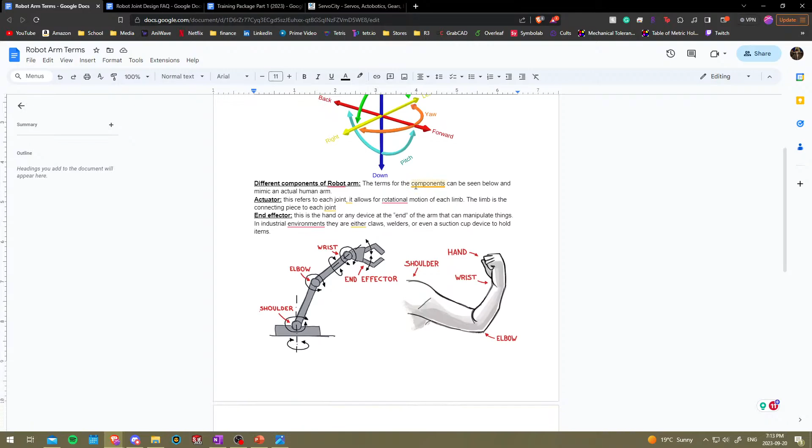Most arms though, you don't need all of the degrees of freedom, and I'll show you how having 6 could benefit you. So before I go into more depth about DOFs, what is a robot arm and what does it do? So a robot arm is just like your regular arm on your body. It's used to grab things, move stuff, type, a whole bunch of functions that require fairly precise actions, precise movement, precise tasks, right? So a robot arm is pretty much the same as a human arm, but it's made out of mechanical and electrical components and it's controlled with software.

And that allows you to move your hand in a full 6 degree of freedom. So before we continue, as you see in this picture here, shoulder, elbow, wrist, same as an arm: shoulder, elbow, wrist, and the hand is just that end effector. With robot arms, the hands are simpler than a regular hand. If you were to make a robotic hand, that would be called a bionic hand.

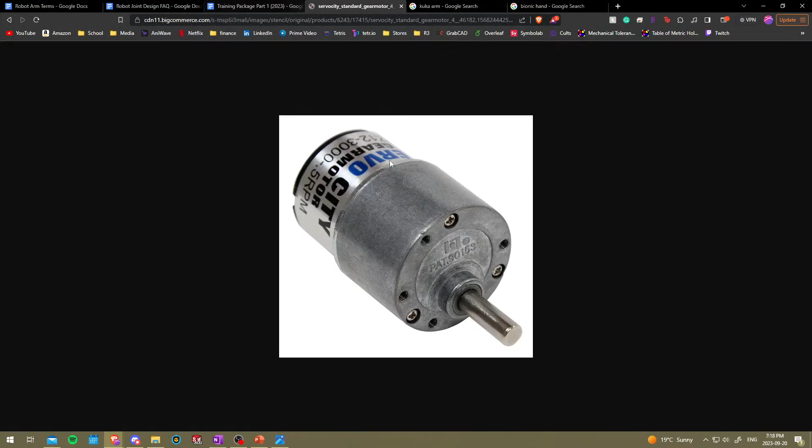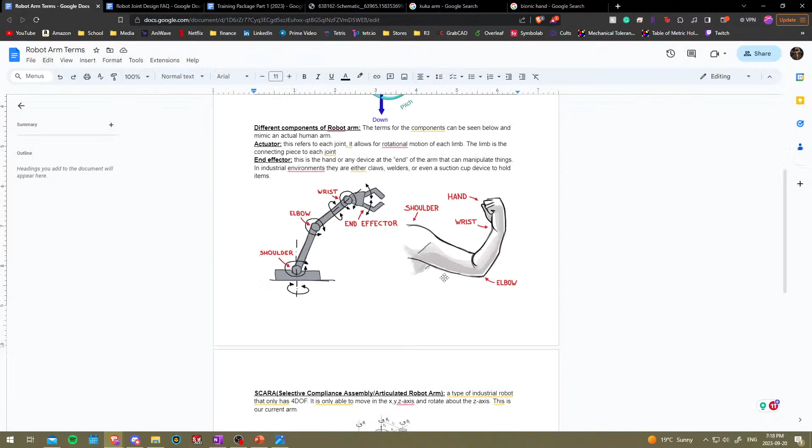But once I find it for you guys on ServoCity, they have a drawing that you could go off of. It's similar to this motor, but I'm just showing you as a reference here. On the web page, they have a drawing of the motor so that you see where the center shaft would be positioned with respect to the mounting holes. So there's a little cheat that I'll give you there for now. But yeah, so those are the components of an arm.

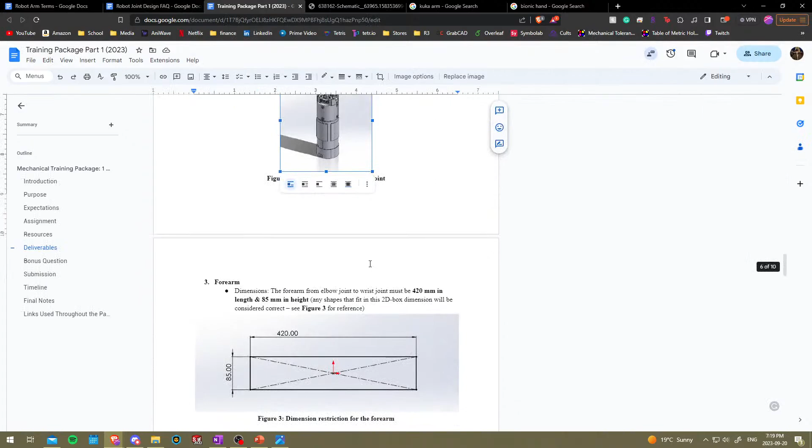Each of these motors for each joint is called an actuator. An actuator refers to something that allows rotational motion. There's something called a linear actuator, which allows a mechanism to move in a linear motion. In this case, the robot actuators are rotational motion. So Huang provides these actuators, like the wrist joint motor.

And I think you guys only have to make a wrist, if I recall. You don't have to make a shoulder joint, but you have to make the forearm. So you're only making half of the robot arm. You're making the end effector, which is the claw, and you're making the forearm, which is the structural component in between the elbow and the wrist.

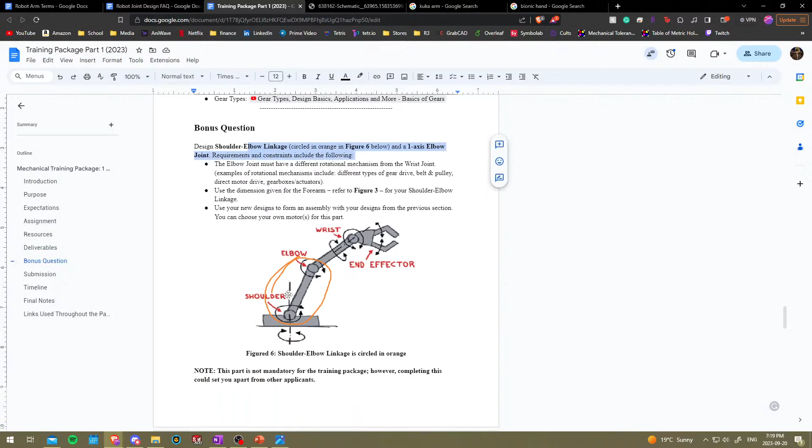So you're not actually working on an elbow. You're not mounting anything to the end of this forearm. That's, I believe, something optional that he gave you for brownie points. Yeah, so for brownie points, he would want you to create the rest of this. You're only required to make half of this.

I think he drew it there. I guess he didn't. Well, it's the other half that's not drawn here. So I'll kind of go over how you could go about that. Before I do,

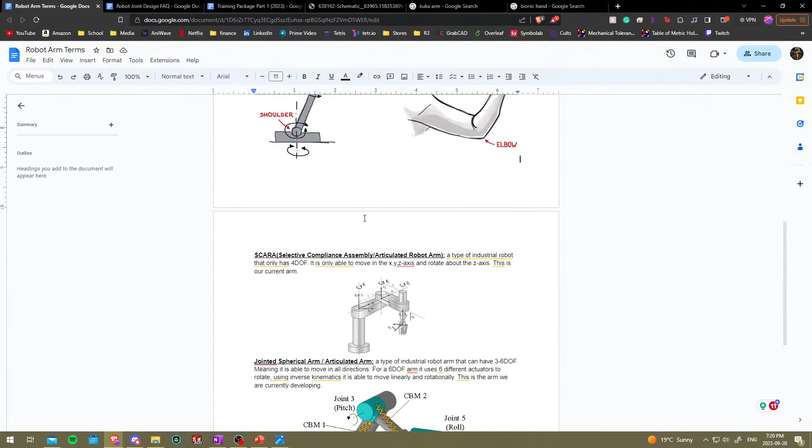so I covered that. So before I move on to how DOFs work on a robot arm, I just want to show you a few different types of robot arms. I know Huang provided some videos, which is this one here. This one's pretty straightforward. The two main ones that we use on our team is a SCARA arm, which is kind of like what our current arm has, because there's a linear component that moves our arm up and down.

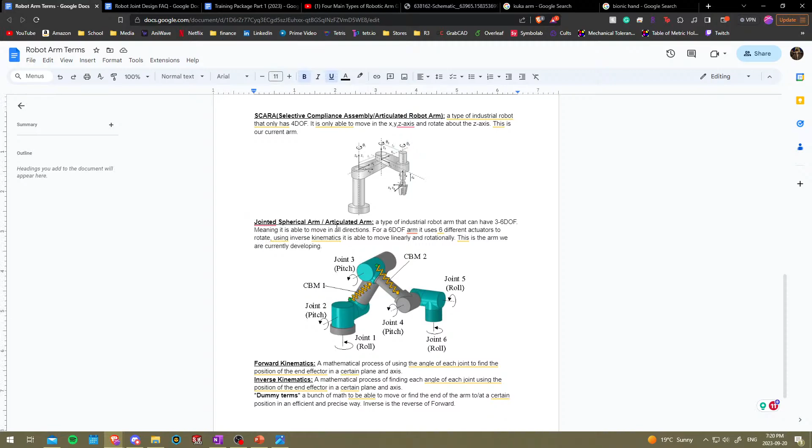So this picture here highlights pretty much how the DOFs would work. Each actuator has two motions where it has a roll and a pitch. This one has a pitch and a roll somewhere here. This one has a pitch and roll. It's kind of hard to visualize in picture. I'll show you a better video later. But that's kind of what it is.

Something here you guys don't need to know about now. There's something called inverse kinematics. It's a mathematical process that a software will be using to control and move our robot. But that's like something that you would have to know as a robot designer if you were to actually want to control it. So, finish covering all that stuff. Guess we will begin on actually how you will be getting started with your design.

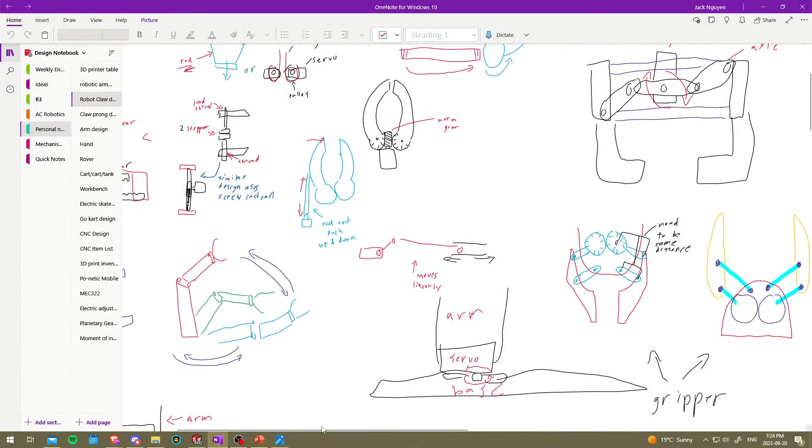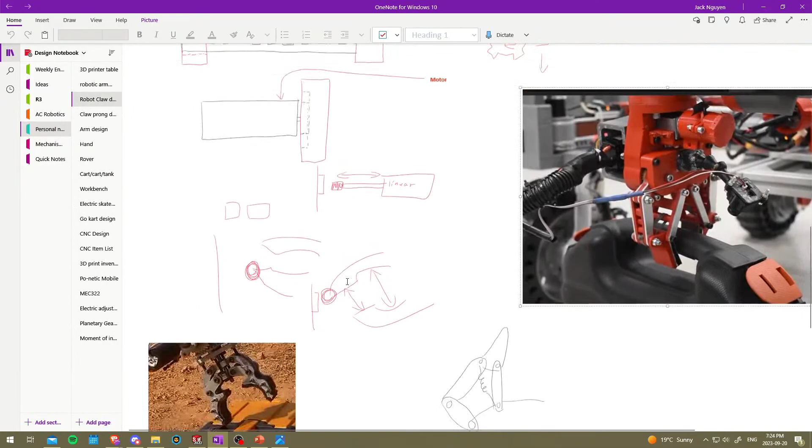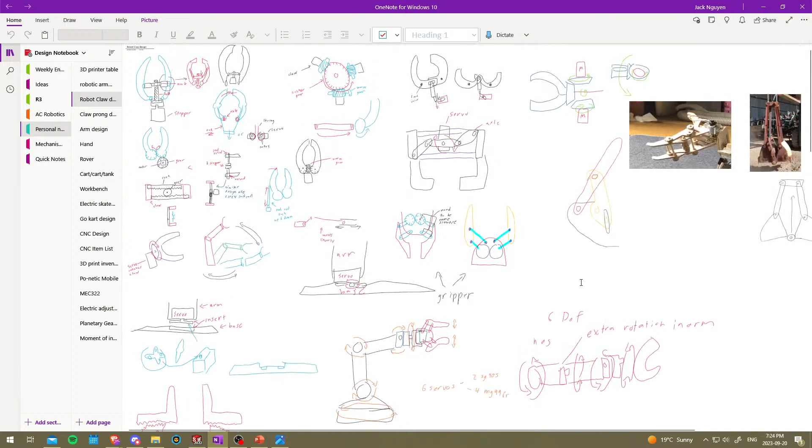So back when I was in first year, I was into robot claws and how different robot claw mechanisms work. So I have a sketchbook of various claw mechanisms, and it's just me trying to figure out how they work just from a picture and a small video on how it's moving, and based off that small video I was able to sketch it out and figure out which points are moving, which points on the claw are fixed, and which points are attached to the motor.

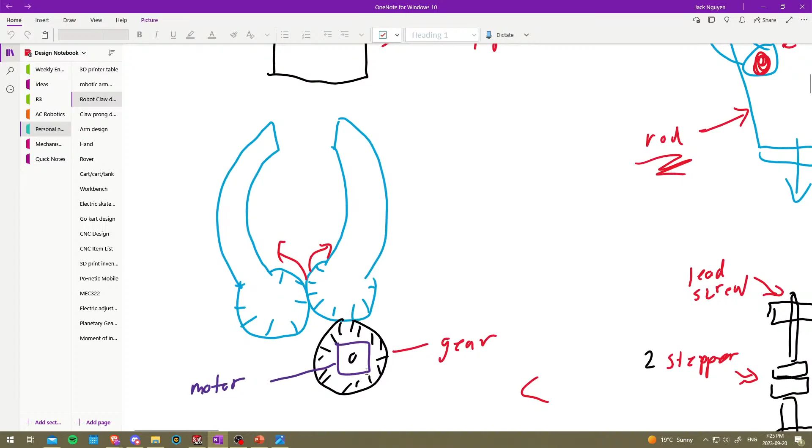So the simplest claw that you could make is, I should have a drawing here, something kind of like this where the two fingers of the claw have a gear on it, and you either drive one of these gears with a motor or you have a separate gear attached to this claw gear and that has a motor. So what do I mean by that? If you look at this claw here, essentially there's no motor on it. Let me find one with a motor.

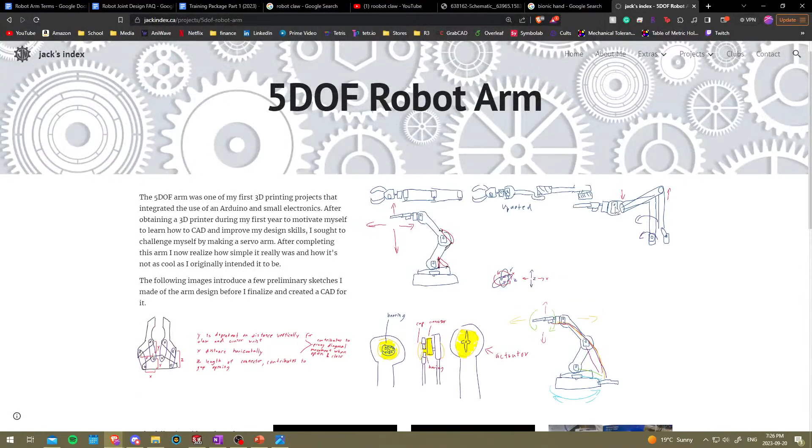Very, very simple. Once you start joining the team, you'll realize, oh, this looks cool at first. Once you understand it, you're probably gonna be like, oh, this is fucking shit. Like for a first year, what the fuck are you doing? This is an easy project. But not knowing anything at first, it is challenging. Once you begin to learn it, it's a lot easier.

So this is what I was saying here. There's a servo connected to this link here, and that link has a gear which allows you to move the other half of the claw. This claw specifically is called a 4-bar linkage claw because there's 4 bars. So I'll pause it here.

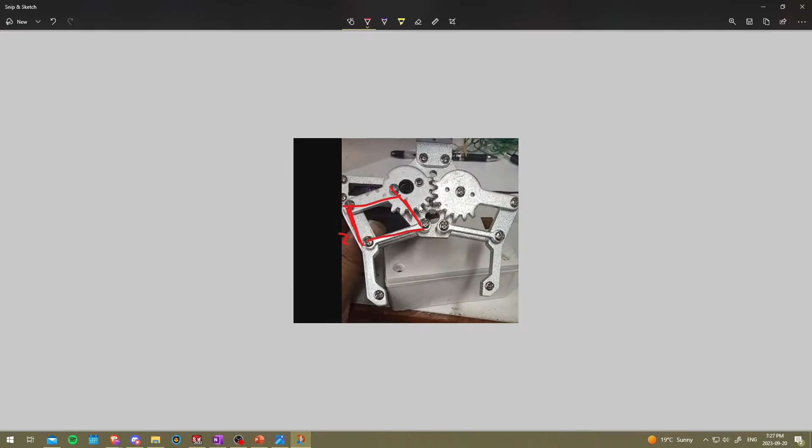There's 1 bar here, there's 1 bar here, 1 bar here, and then this base joint is a bar, but it's a fixed bar, so that this second bar here, I'll call this bar number 2, can move freely in air, and then bar 1 is fixed. So you could do a 4-bar linkage claw.

It's pretty simple. This one here is also a 4-bar linkage, but it uses a whole different mechanism. So instead of gears, it uses a screw here, and as the motor turns the screw, the nut in the center of here will move up and down, and that's pretty much a linear actuator. This mechanism here causes an item to move in a linear motion. So that's one other idea.

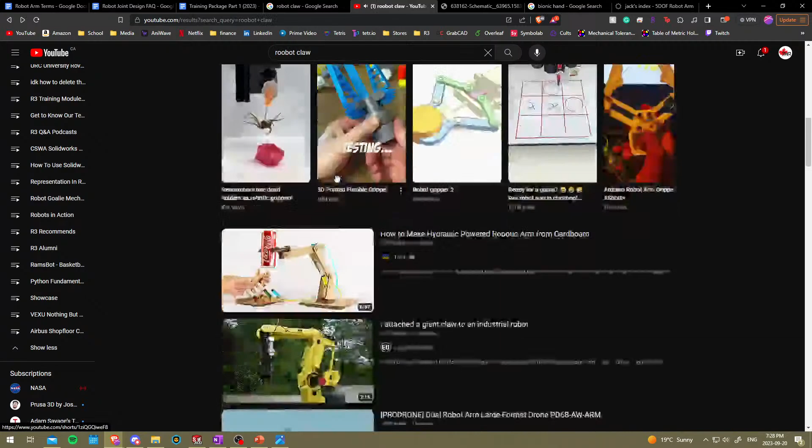But yeah, I would start off with just searching up claw designs. YouTube shorts, YouTube videos, TikToks, Google images are perfect references on how you could do that. Just make sure that whatever you do, it somehow integrates this motor. Because if it doesn't, then you didn't make what Huang wanted you to make.

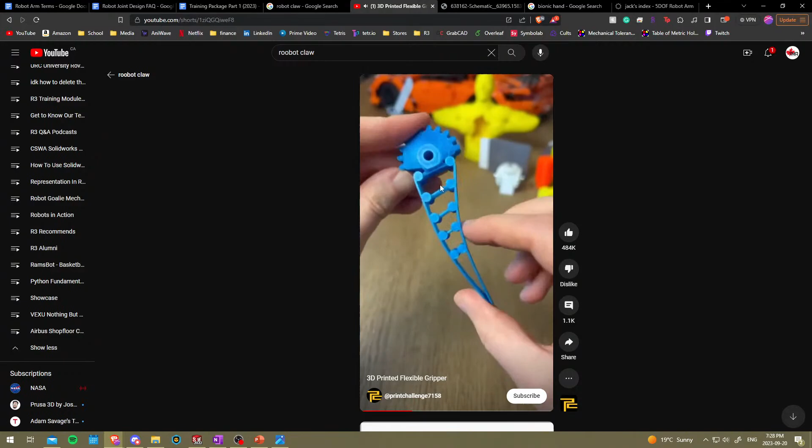So I'll show you one more design here. You don't have to go as high tech as this guy. He made his claw have these cutouts so that it's compliant, which means that it's bendable. It could grasp against an object. You don't have to do that. If you want to make your claw have a compliant finger, go for it.

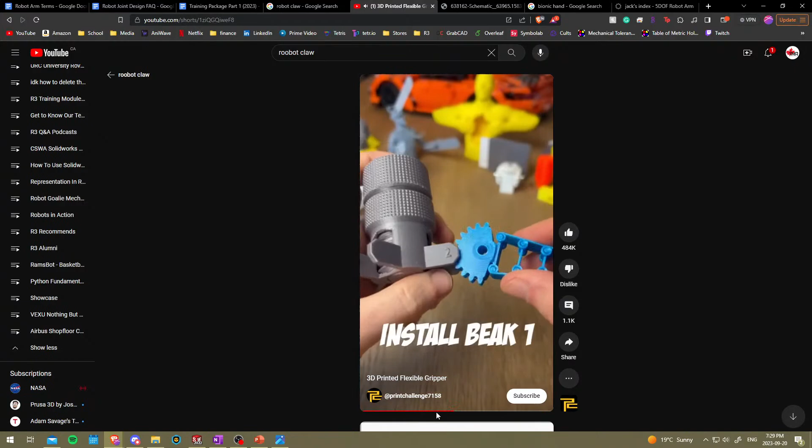I feel like for Huang, if he sees that, he's gonna be like, oh shit, this guy knows some mechanical knowledge. He's probably smart as shit. So it is brownie points if you do that.

Some other claw designs, like our current ones, we put a rubber grip. So if you look at this yellow piece, it's a rubber grip on the end of the claw so that it could grab it better. It provides a constant force. If that's too difficult for you, you don't even have to add that rubber grip. You could just keep it without the rubber grip.

So if you look at this one here, it's literally just 2 fingers with a gear at the end. This would be, I'd say, the simplest design you could make. If you're a first year and you're a little bit intimidated on how well you're gonna do, I'd say stick to something like this because it's a little easier to do. It's a good start. But obviously it won't bring you to team A. You'd probably be team B.

Okay, so next is the one axis wrist joint. So when he says one axis, that means one DOF. So it only moves the claw in 1 degree of freedom.

Axis and DOFs can be interchangeable, but usually with axis, there's only 3 axes of motion, the Z, Y, X axis, and then you could rotate about those axes. But yeah, that's what he means by one axis.

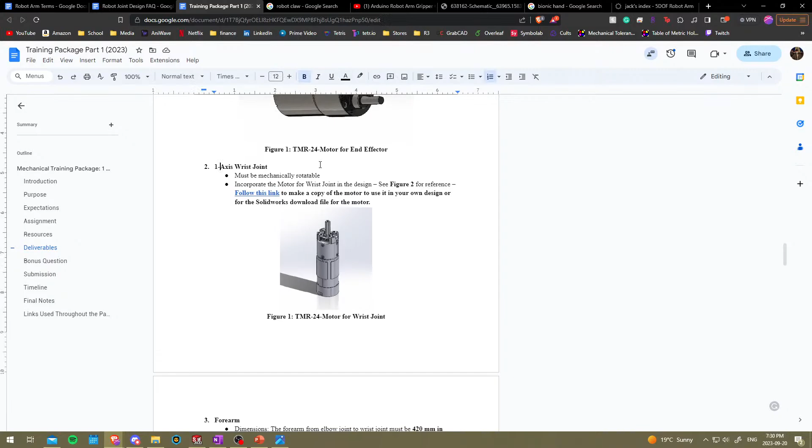So if you search up robot wrist, hopefully we could find some sources. The issue with some of these sources, it might show you an actual bionic wrist, which is something that you probably don't want. So let's see if we search up one axis robot wrist, that might be more specific.

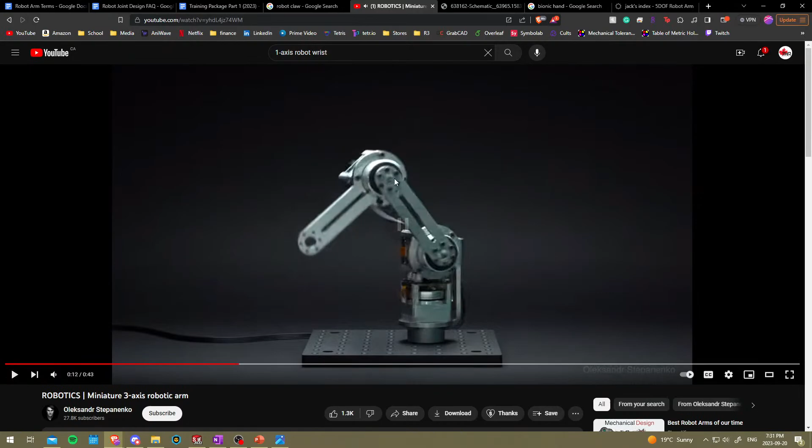It's a very hard thing with this because you won't find the specific video you want. You kind of have to watch videos on robots. I believe Huang attached this video to the training package, but this robot here is a three-axis or a three-DOF robot because it could rotate about here, and the base is able to rotate. So that's three different motions that it's able to do.

And the wrist would pretty much be this motor here, and then this piece would essentially be your claw. So you have to figure out, okay, I have a motor here. I want to connect that motor to a claw, and then also this motor needs to be mounted to this forearm, which is this bar. So what you want to make is just this upper half. So this here is the wrist.

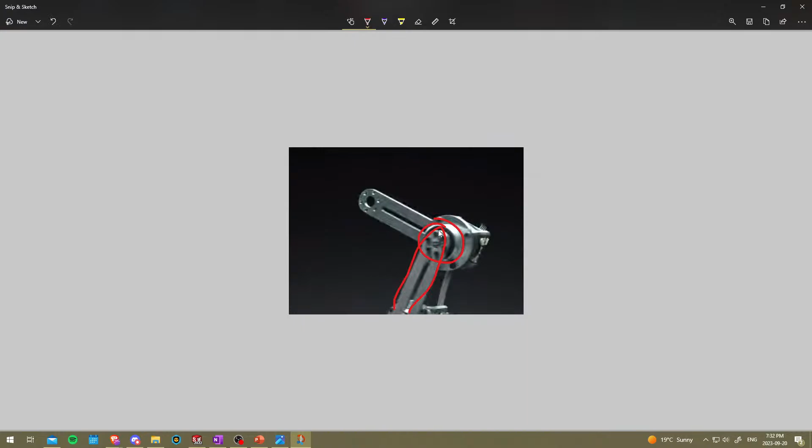Somehow a motor is mounted to that, and additionally the motor shaft is mounted to this piece here, which will be your claw. So that's what you're gonna be designing. The claw has its own motor, obviously, but once you figure out how to make the claw, then you could figure out how to mount that claw to a wrist, and then how to mount the wrist onto a forearm.

So that means you need to figure out how to mount motors, and you don't learn this in school, but if you search up motor mounting, there's different ways you can mount a motor. If you look at this here, there's a bracket where this plate here screws onto this motor, and then it frees up the shaft so that anything that's connected to the shaft can freely rotate. So same thing with this motor. It has a bracket where there's a plate,

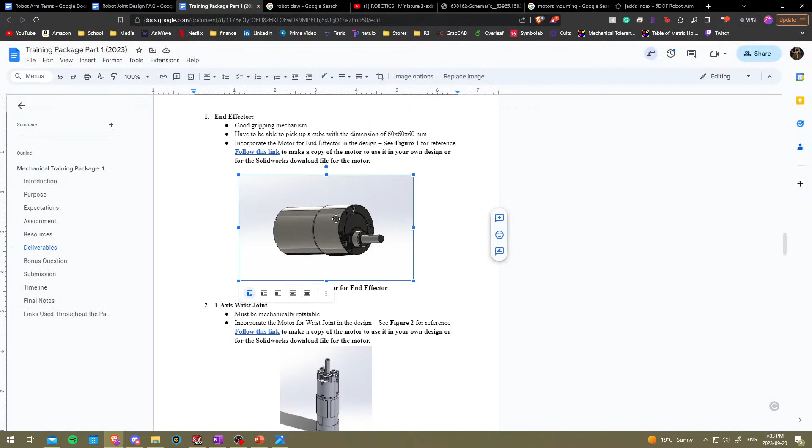and that plate allows you to screw in screws onto the mounting holes of the motor. So if you look at this motor, it's kind of hard to see, but there's actually four or five mounting holes. So if I zoom in, let's zoom in here. This is a mounting hole, this is a mounting hole, this is a mounting hole, and that's a mounting hole. So you have four mounting holes, and you would have to make some form of plate.

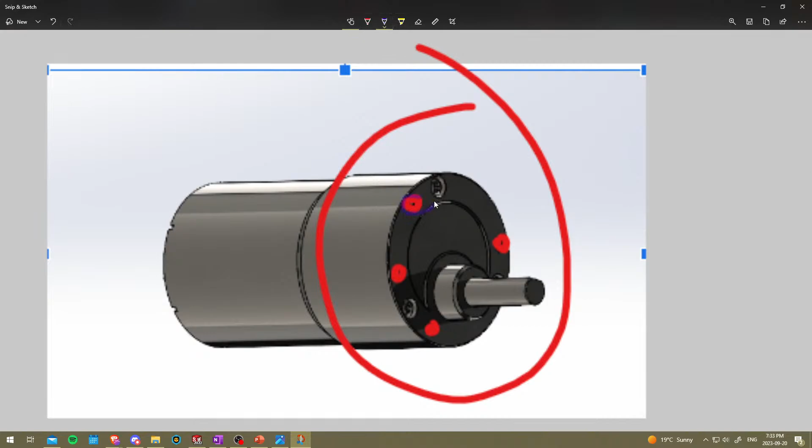It doesn't have to be a plate, but some sort of object that has holes so that you could put screws into these holes to mount it onto an item. And then also it would need a hole here so that the shaft could feed through it. So that's how you'd mount a motor onto your forearm, whatever your forearm is.

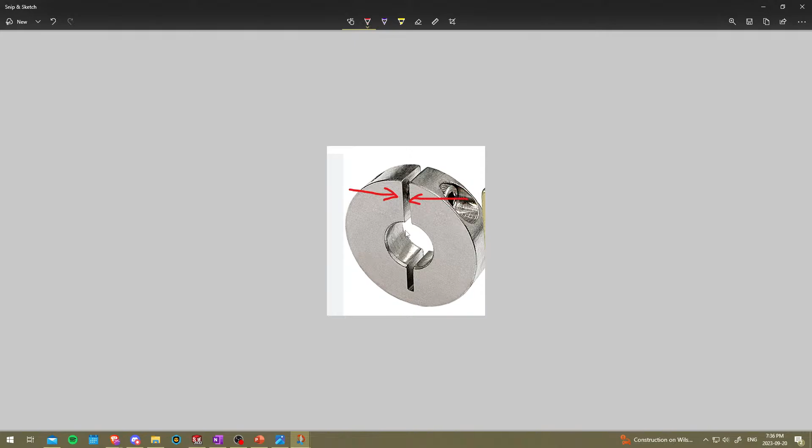As you tighten the screw, what happens is this cut here will begin to close in on itself, and this circular hole was once a circle. That's a terrible circle, I'm sorry. It's once a circle. Once you screw it in, it kind of becomes like an oval, and that force from the clamp will cause it to stay on the shaft. So that's how you would mount something onto the shaft of the motor.

You'd have to figure out your own mounting mechanism to get that shaft mount onto the claw itself. And then you'd also have to figure out a way to mount the motor mount onto the wrist that you're making. So I'm not gonna cheat here. I'm not gonna help you guys cheat, but I will give you some rough ideas on what I would do and what you could do. So I'm gonna proceed with caution right now because if I go too far, Huang is going to kill me.

So let's say, I'm gonna download a random motor off of ServoCity. I'm not gonna use the one that he gave you because then you guys have access to my video and you'll just copy it. So I'm gonna take a random one off of this website here. So I'll take this. This website's good because you could usually download the parts on SolidWorks. I don't think you could download these ones. Huh. Alright. Give me 1 second. I'm gonna choose this one for now.

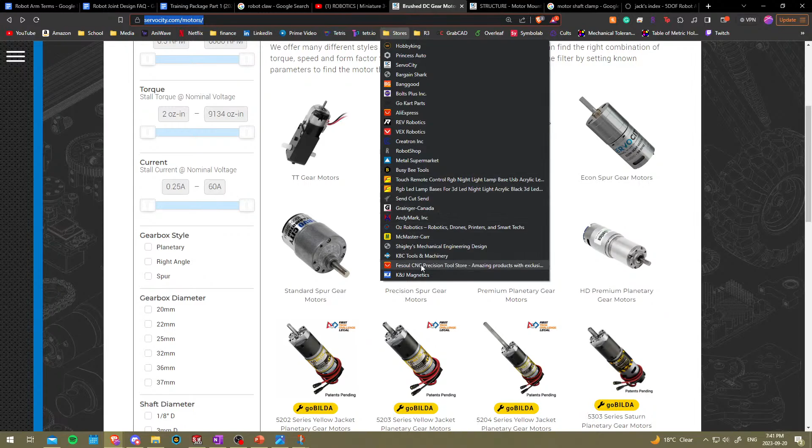Okay, well this website doesn't have any of the things that I need, so I'm gonna go on a different website. If you see, I use a lot of different sites. Most of these are because of R3, or sorry, TMR. Damn, bro, these websites don't give the CADs for this stuff anymore. Interesting. Okay, Rev does. I'll use Rev.

God damn. Why is it so much work just to get a fucking motor? Alright, I'm gonna take this one for now. Where is the CAD? Okay, well, I'm just gonna go on my files and find it. I don't know why I can't find anything right now. Okay, let's use this. Sure, yes. Okay, we'll use this motor.

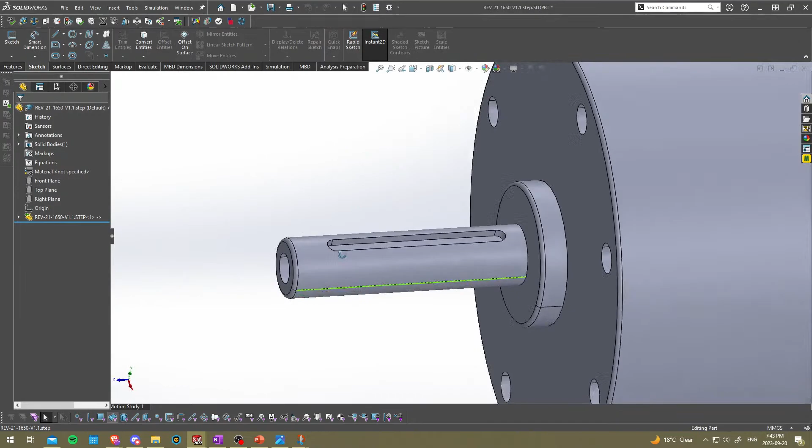So this motor here has a shaft. On that shaft, obviously the motor itself has these, how many is that? 7 mounting screws. So say we gotta make a wrist for, I'm gonna make a fake claw. So let's make a fake claw. So imagine somehow you finish the first step in like 30 minutes. Good for you. And you designed your first ever robot claw that mounts some form of motor.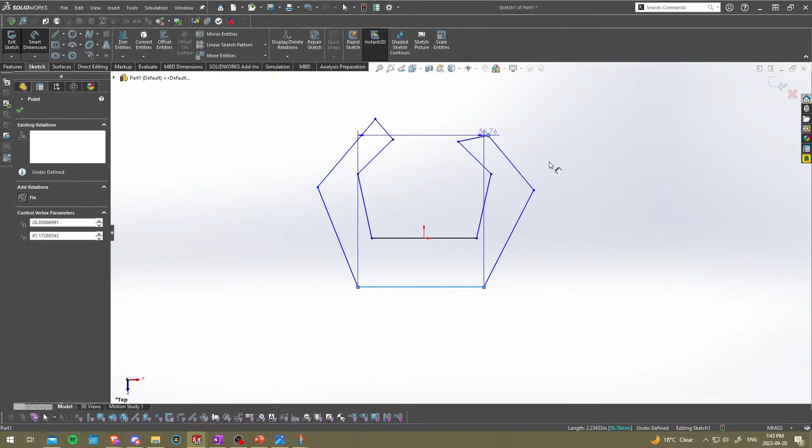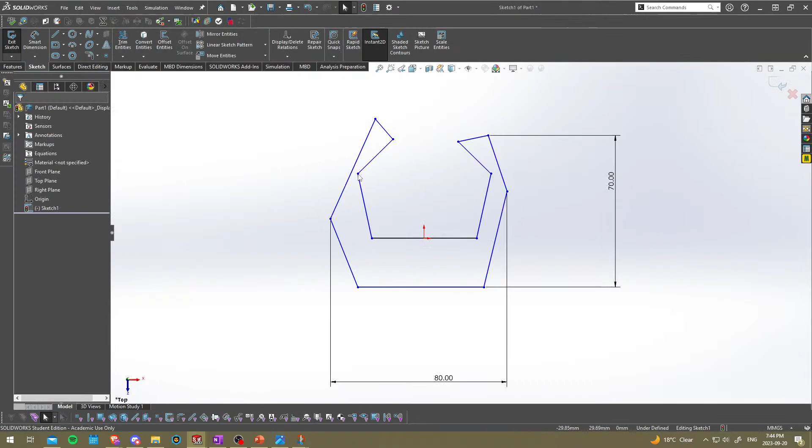Abdurrahman here said he didn't bother with fasteners. I don't know what Huang's rules are about fasteners. I know last year I said no to fasteners because it's hard to learn fasteners at first. It took me a while to figure out how to spec fasteners and all that type of stuff. So you don't have to worry about that. Okay, so let's say this is my claw, and then I'm gonna put a hole here, some form of hole. Yes.

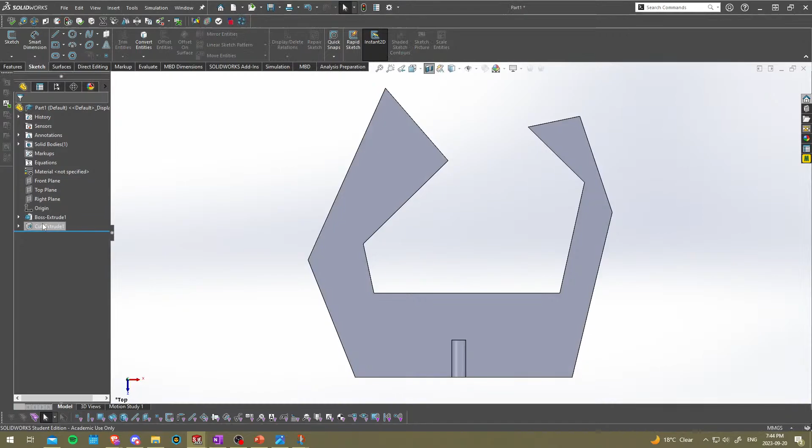Okay, and then this hole here is gonna have a set screw in the middle. So I'm just using, okay, I'm gonna do this slowly again because I realize a lot of you guys might not know how to CAD or use SolidWorks. For those that decide to download SolidWorks, I'll do this slowly.

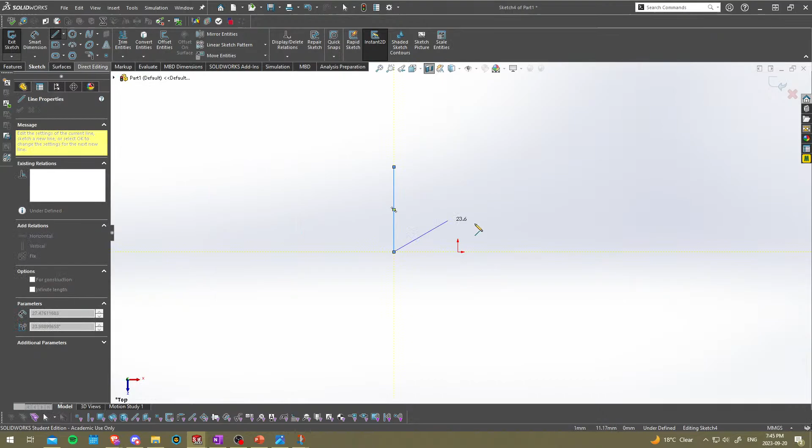So there's different tools, line tool, circle tool, square tool, whatever. Since I'm making a dummy claw, I'm just going to use the line tool. You select the line tool, and then once you place a line, it continues to create more lines that are attached to each other. And you could keep placing them. And once you want to stop, you could either enclose whatever you're making and it'll stop the line tool, or you could hit escape on your keyboard and it'll stop the line tool from continuing.

So let's say this is my claw here. Smart dimension lets you dimension your drawing. So this is random sizing. I'm just gonna make this 70, make that 70, make this 15.

There's another feature that you could do when you click on one line, hold control on your keyboard, click on another line. It selects both of them at the same time, and then on your left-hand window, there's something called the property view or the properties window. And under there, there's something called add relations, and you could basically add a relationship between the two lines. So if you want them to be equal length, you could hit equal, and that will do that for you. So I'm going to make these equal because it's the same thing.

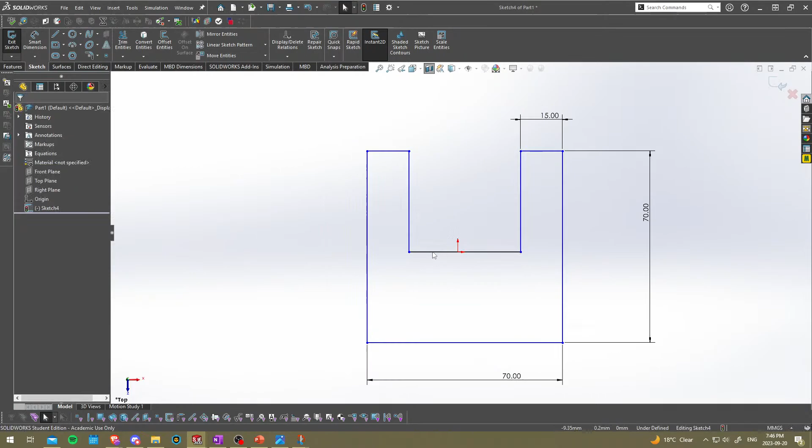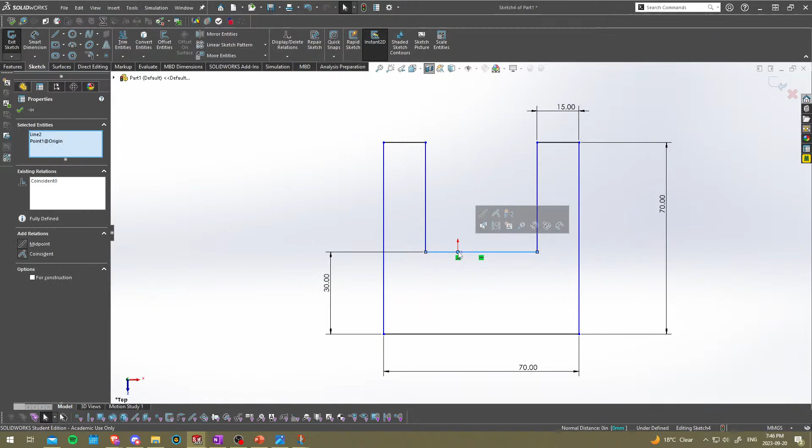Okay, so right now it's blue. If the lines are blue and not black like this here, it means it's undefined. So that means you could still move it. You haven't fully constrained it with dimensions or relations. So I think my last dimension here is this one, and then this could still move. So I will center this by selecting the origin, this line, and choosing the midpoint relation. So now it's fully defined because it's black.

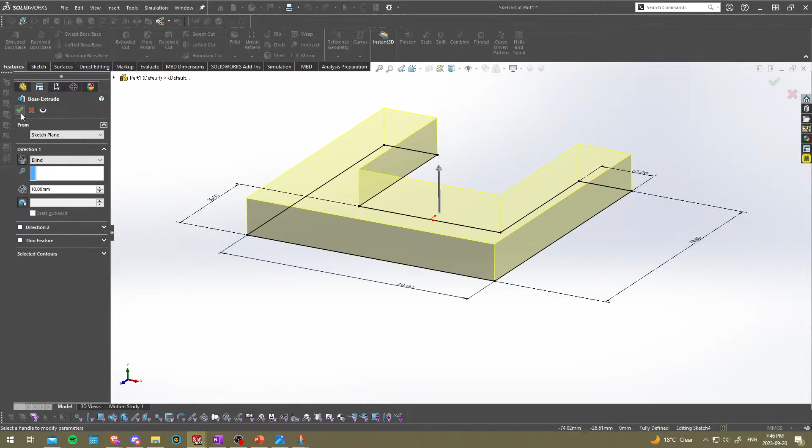I could hit boss extrude to make this 2D shape into a 3D shape. So I do that here, and then you could set this dimension. I'll make it 10, arbitrary value, but a lot of the dimensioning portion that you're going to be doing is all arbitrary. There's no set dimensioning number for you to use. It's just, oh, I think this looks nice and I wanted an even number, so I'll put 10. So that's kind of what I did here.

I like the numbers 5, 10s, and even numbers, so 2, 4s. I don't like 6, so I usually keep it to 2, 4, 5, 8, and 10s. But that's just my preference. Everyone has their own preference.

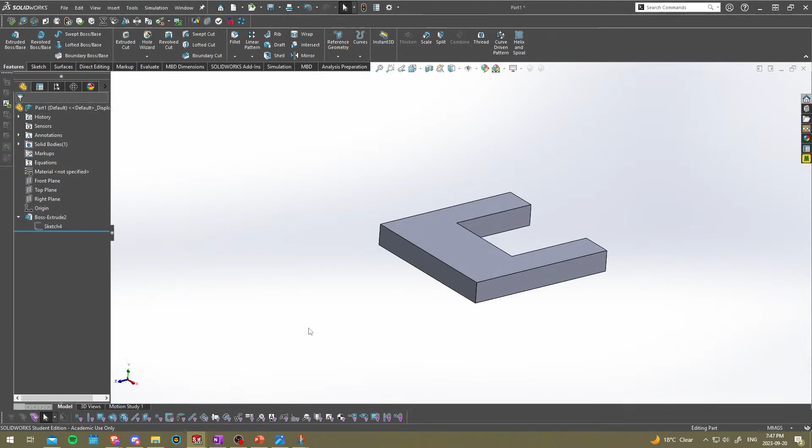So this is my dummy claw. Imagine somehow a motor mounts onto it. I'm not going to add the motor. And then I need to add some form of mounting system so that this motor shaft can mount onto this claw so that it works as a wrist. I'm going to make something simple here. So like that set screw mounting mechanism that I showed you earlier. I'm going to make a hole for that shaft to go in.

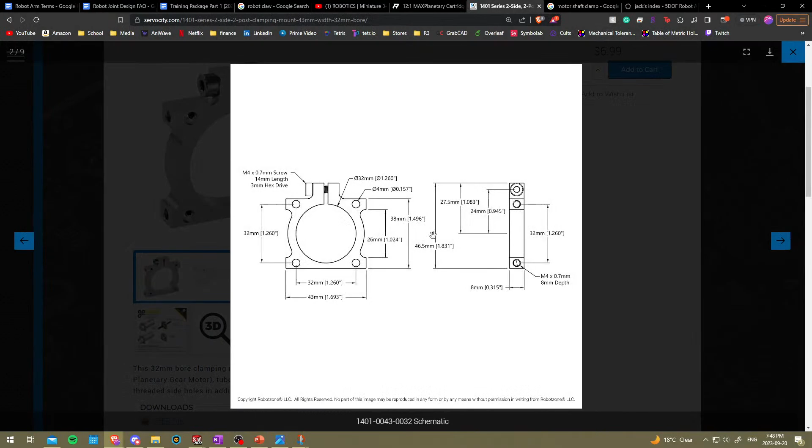So you take that shaft and you would measure it. The way you would measure it is figure out what the part number is, go to ServoCity, type in the part number, and then when you open up the motor, there's going to be a drawing on the web page. For my case, I don't know what this motor is, so I'm just going to choose evaluate and hit measure, and then click on this here to get the radius. So the radius is 4 millimeters. That means it's 8 millimeters in diameter, so I'll make that 8.

It's a pretty big hole. Okay, let me make this a little thicker since the hole is so big. And then I'll center this. Okay, that's 8 millimeters. Now the last thing is just to fix this so that it stays at this point. So I'm gonna take this here and take this center point and choose vertical, and that basically fixes it so that this point is always vertical about this origin point.

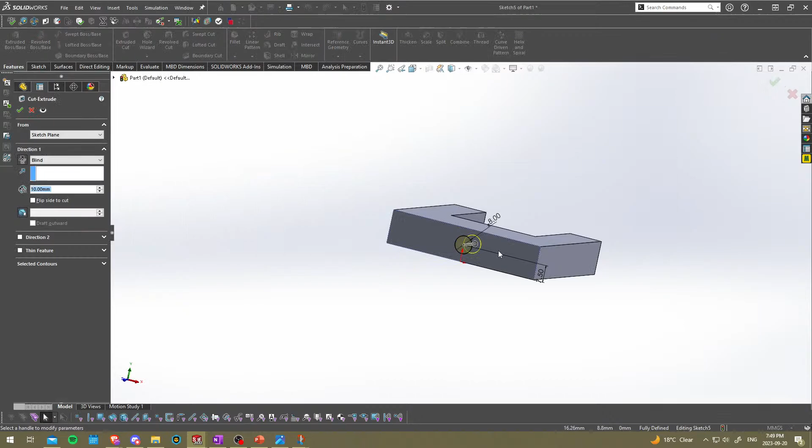And then I'm gonna cut extrude to make a hole into the part. So 15, arbitrary value. You could make it the length of the shaft. But if you make it the length of the shaft, remember you have to take into account the mounting plate or the mounting point on this motor itself. So I'll only do like 2/3 of the length.

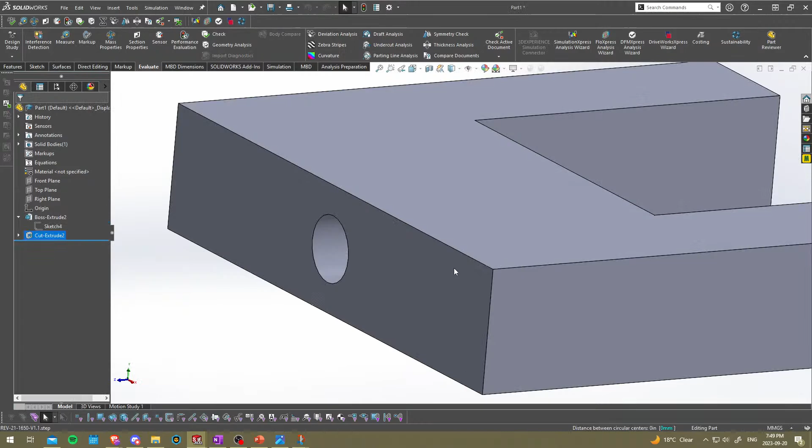So let's measure this. That's not the right thing. Measure, so hit that, hit that. Okay, measure tool doesn't want to work. So it's 31.5 millimeters in SolidWorks, and if you're using Onshape, it's pretty nice because you could put equations into them. So I will put 31.5 times 2 and then divide it by 3, and it will do the math for me. So 21 millimeters. So we made a 21 millimeter hole for that shaft.

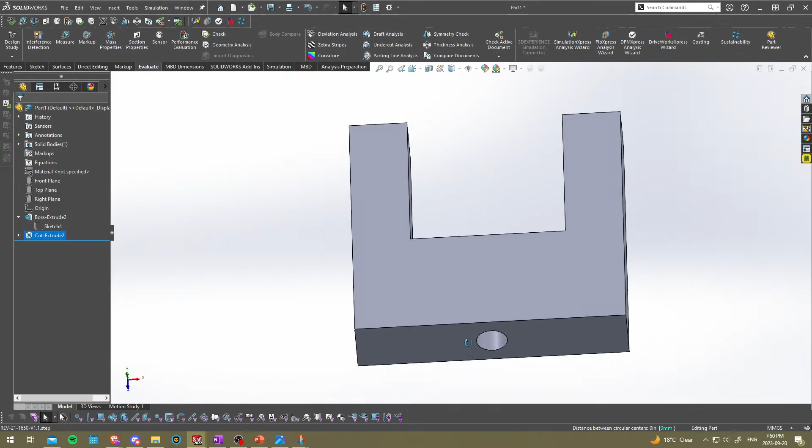Now I have a few options. I can make a set screw so that it applies force onto the shaft and it holds it in place. Or I could do the clamping mechanism. With this design here, it's a little bit harder to make a clamping mechanism because I would have to have that clamping screw, and it'd just be more work. You could do it, you just have to figure out how to make it.

There's another thing that a lot of modern machinery uses nowadays. It's called a keyway. So shaft keyway, what that does is it couples the shaft onto whatever you're putting the shaft onto. It couples it so that it could rotate together. So the reason why we're mounting stuff onto a shaft is so that it could rotate with the shaft.

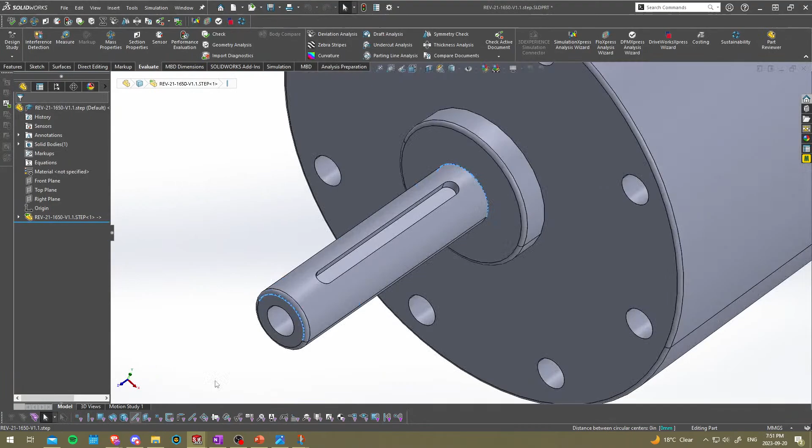This keyway, the way it works is you would have to make a keyway into your part, and then your shaft would need a key seat, which is this component, and then you would also need a key, which is like a piece of metal that seats into the key seat, and it also slides into the keyway. So if you look at the shaft that we're using, it has a key seat. So if I wanted to, I would just cut a keyway into this hole here and then put a key into it.

The issue with this though is it couples it when it rotates, but that means you could still slide it in and out. You obviously want it so that it can't slide in and out, and it could also rotate the part. So in this case, we'll just stick to a set screw because it's simple. I don't think it's too big of a deal if you have a set screw in yours.

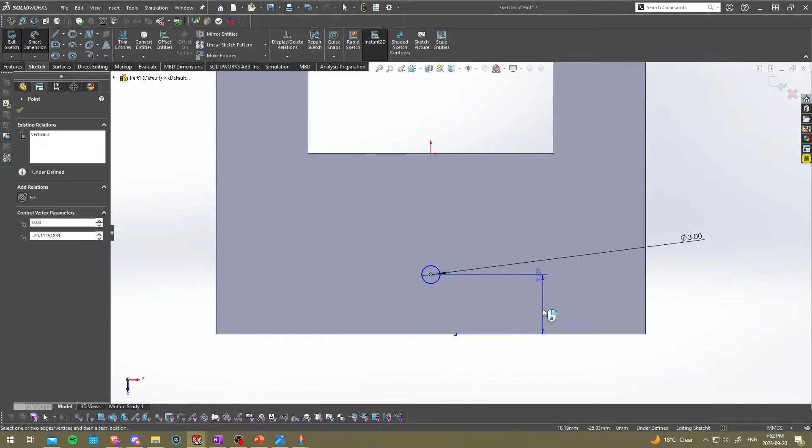I know last year one thing that I was testing on is to see if people would incorporate a set screw or some type of clamping mechanism, which they didn't. So this year I'm just gonna teach it because it's kind of hard to know if you're not a third year, because you learn it in third year.

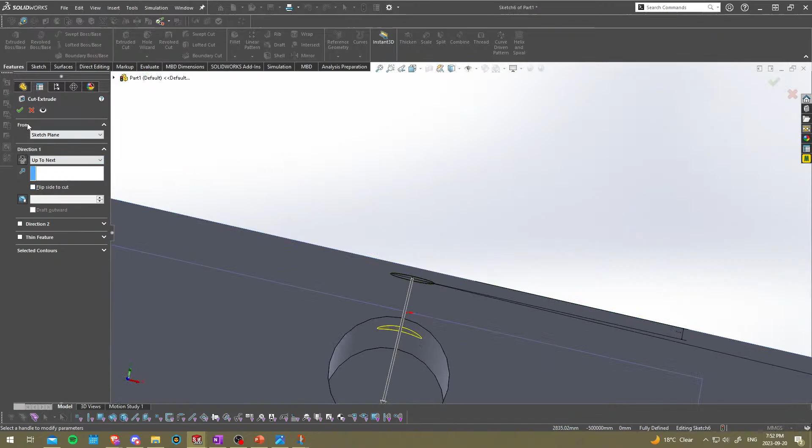So I'm gonna change this to up to next, which cuts it up until the next contour, the next face. So it only cuts up to there, it doesn't cut straight through the part. And this is my little keyhole. You could be a little extra and choose the thread feature to cut a thread into this hole. I'm gonna do that right now, but you guys don't have to do that at all. This is just me being extra.

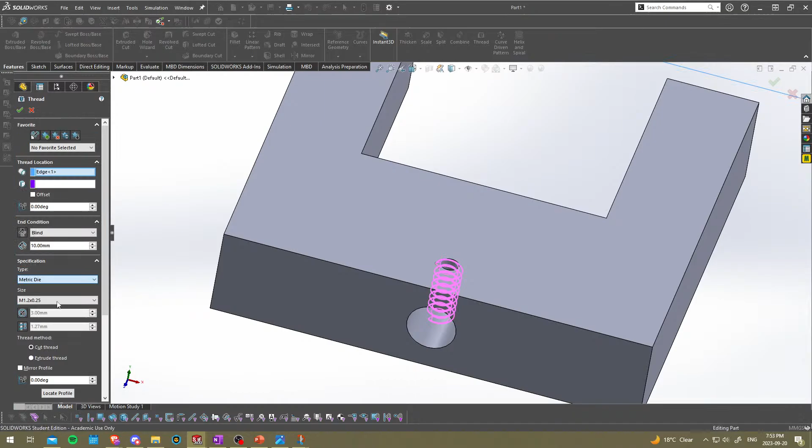I made this hole 3 millimeters for an M3 thread. Nice. M3 is not even here. M2. Oh no, it is. M3. Okay. That's good. It only needs to go up until, I'm gonna make a guess and call it 8. Yeah. No, 8 is too much.

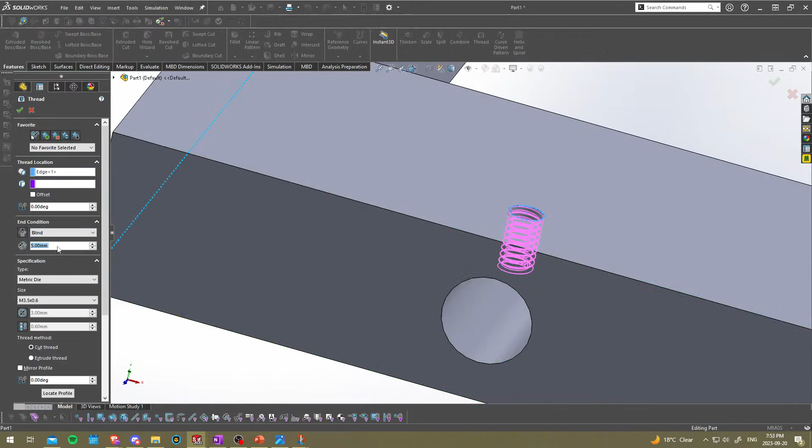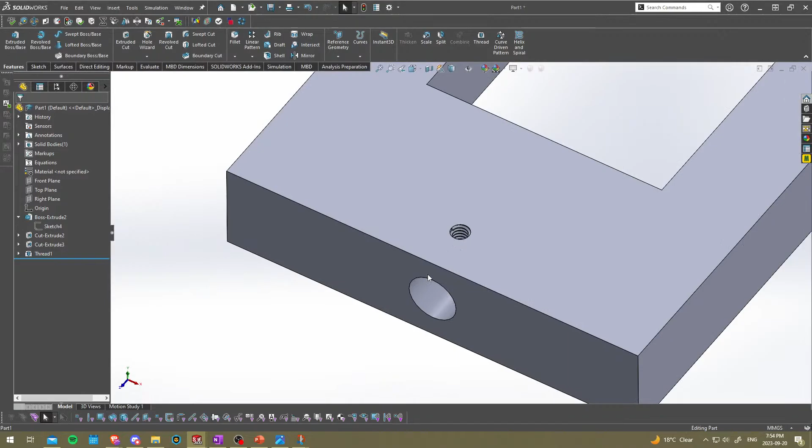Let's do up to selection. So up to this point, or up to this point. Do that? No, that doesn't work. Okay, that's fine. I'll just do blind. So we'll do it for 5 millimeters. Like I said, this is completely optional. Use extrude, yes. So it just makes a thread here. This is extra as fuck. You don't have to do it, but I'm just trying to show you. The set screw hole has a thread so that you can put a screw straight through it.

So now let me show you how this wrist is gonna work. So we'll make an assembly. Let's save this. Where should I save this? Dummy claw. It doesn't look like a claw, but it will work. So make assembly.

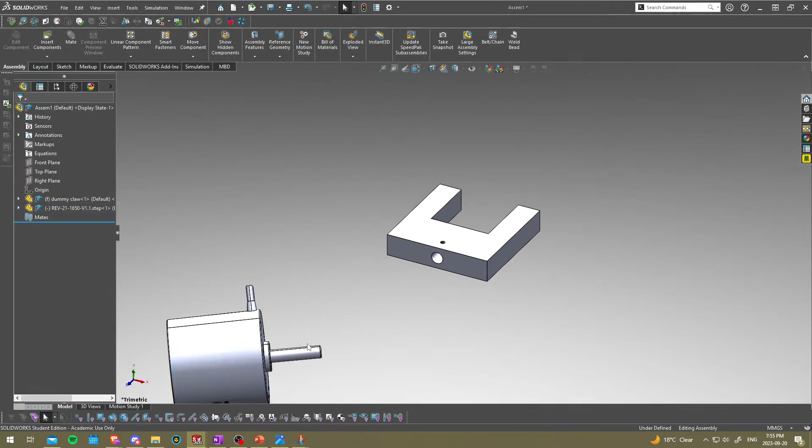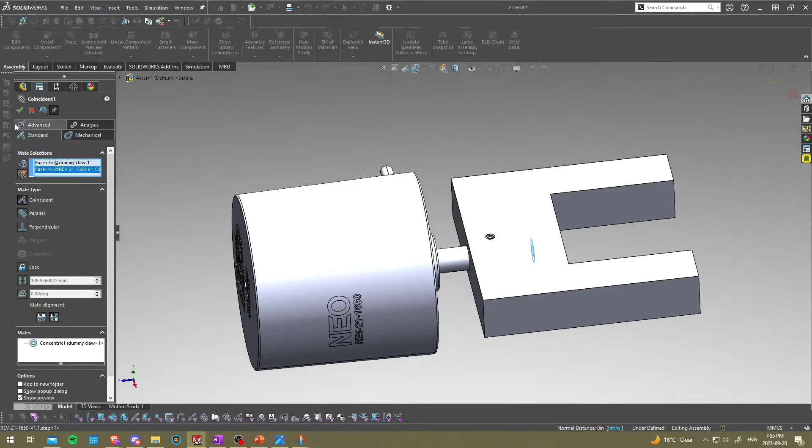And then add that motor in. And then pretty much just mate the shaft onto this hole, or like the claw mounting point. This is just arbitrary, obviously. Shit, I can't see the inside of that. Hit that, hit this. Good thing with SolidWorks is it automatically mates. For those using Onshape, you have to choose the specific mate. So the tutorial will kind of go over that.

Do you need to design parts with tolerance? No. So you don't need to incorporate tolerance in your part. Usually when you're designing parts in SolidWorks, you could add a tolerance feature to your dimensions, but usually the tolerance is easier to do in your drawing that you're going to send out to manufacturer. So none of these are actually getting made, so you don't need to tolerance them.

But if you were to make it, let's say, if you were to 3D print it, you would have to undersize certain dimensions or oversize certain dimensions so that it fits properly. If it's to be made out of metal, you would make a part drawing, and then from that drawing you would add tolerancing to your dimensions. But for something like this, you just dimension it so that it could mate in assembly, and that's perfectly fine. I don't think we're really looking for tolerance for something like this, so don't worry about it.

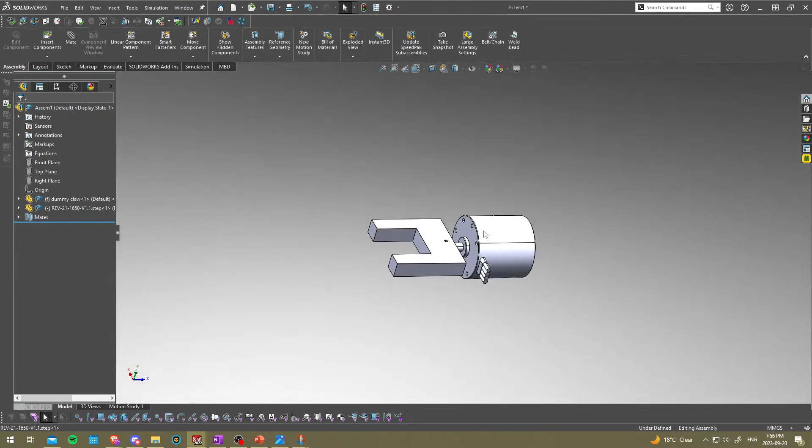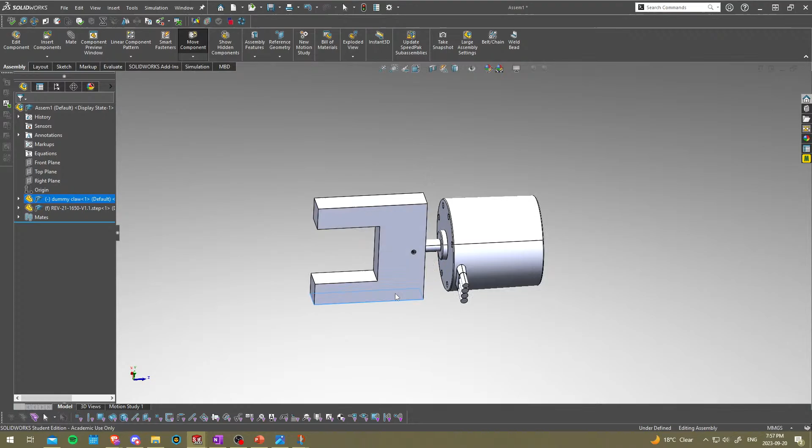Okay, so this motor here, this wrist motor connects the fake claw here. I just made that float because with assemblies, the first object you place in is always fixed. So float just lets you move it. I'm gonna fix this so it doesn't move. So if you see, it's mounted, so this motor, as you power it, would rotate this claw here. So that's essentially what you want.

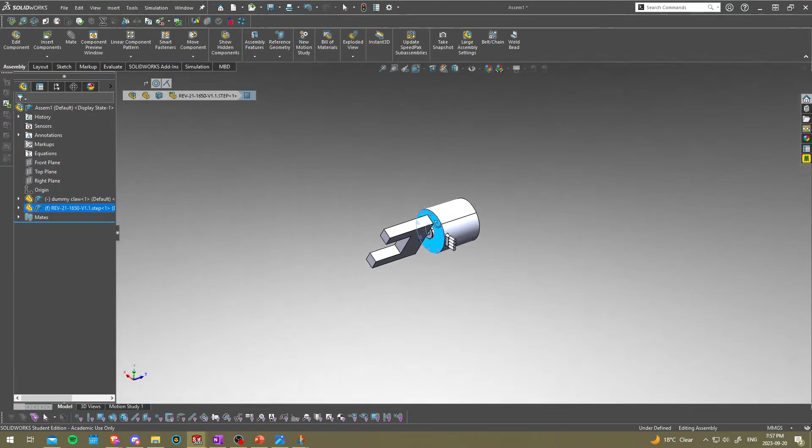And then the next thing you want is the forearm, which is literally just a structural piece that goes from this wrist motor to whatever the shoulder motor is going to be. Huang, did you want the wrist to move the claw this way, or did you want the claw to tilt? Because if you want it to tilt, then this design that I just showed is flawed.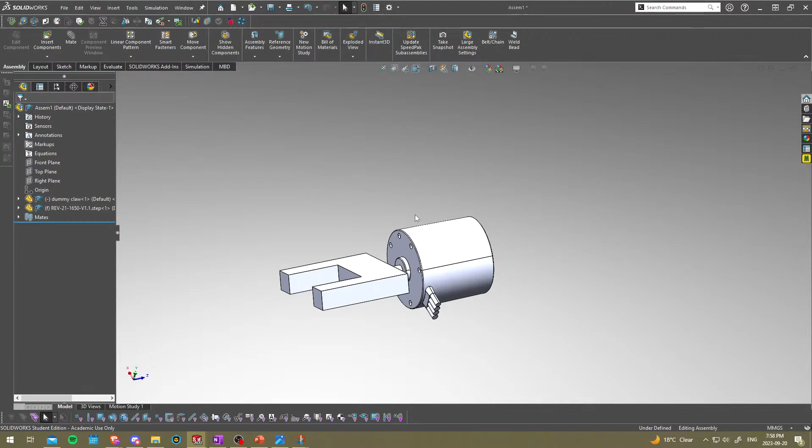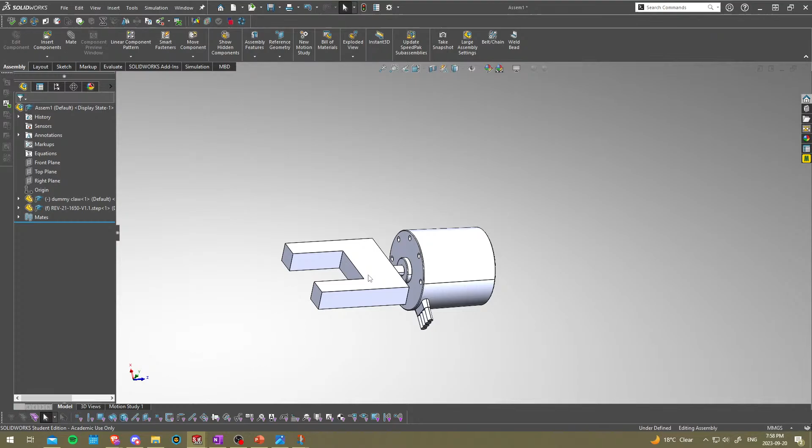So they could choose. What I just said there, the way your wrist works, if you look at your hand right now and try moving it, you could rotate it, and you could also rotate it down and up. So that's 2 degrees of motion because you could rotate your hand and then you could pivot it up and down. So this here just provides hand rotation.

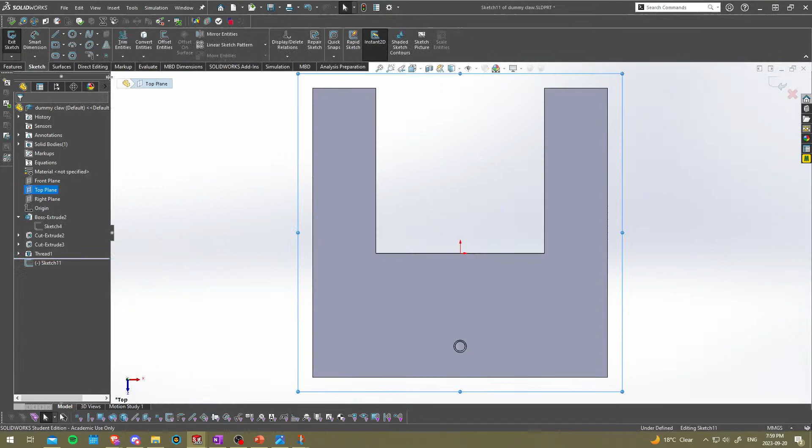It doesn't provide that pivot up and down movement where it goes down like that and then it could pivot up like this. So if you want something like that, then this design here won't work. You'd have to do something else with how you mount it. So you need to mount the motor like this, let's say. I could do that quickly just so that you understand the other option. So let's say the wrist starts here. It's gonna start getting a little ugly, but it's a good way to show.

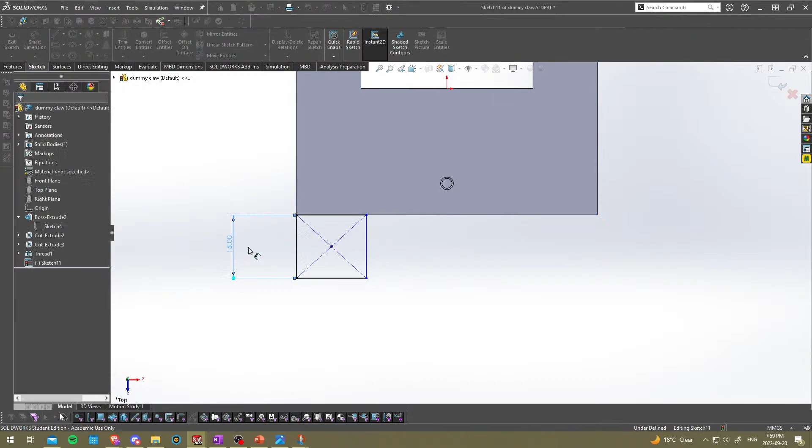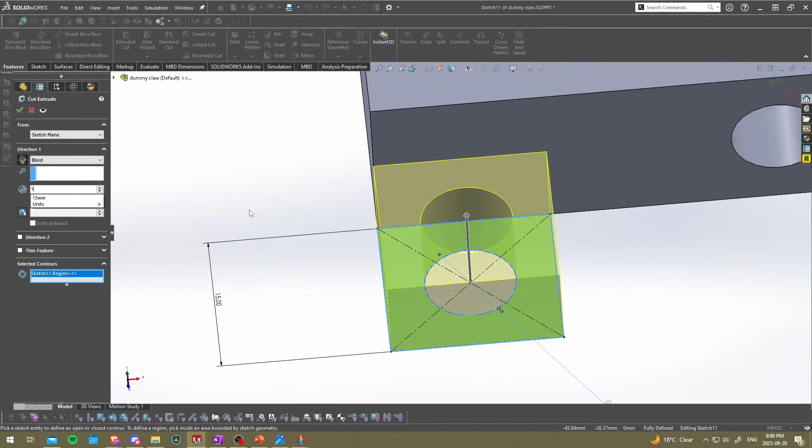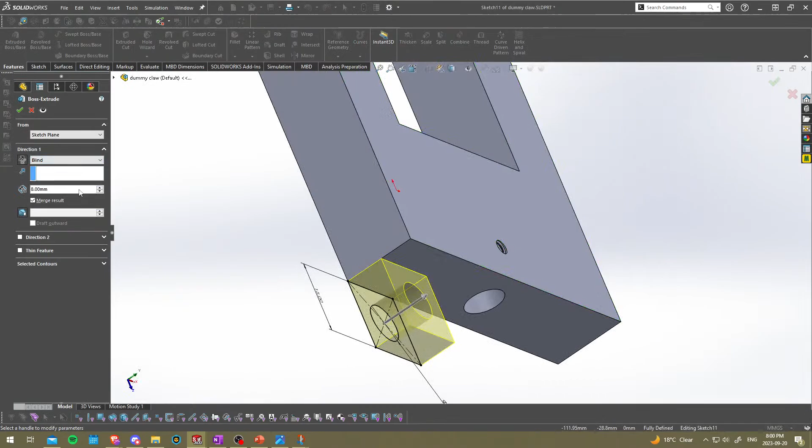Oh, that's not. What? It's not intersect the model. What are you talking about? The intended cut does not intersect the model. Okay, let me see what's wrong with this. I don't know why my thing is tripping out. I think I accidentally did an extrude cut.

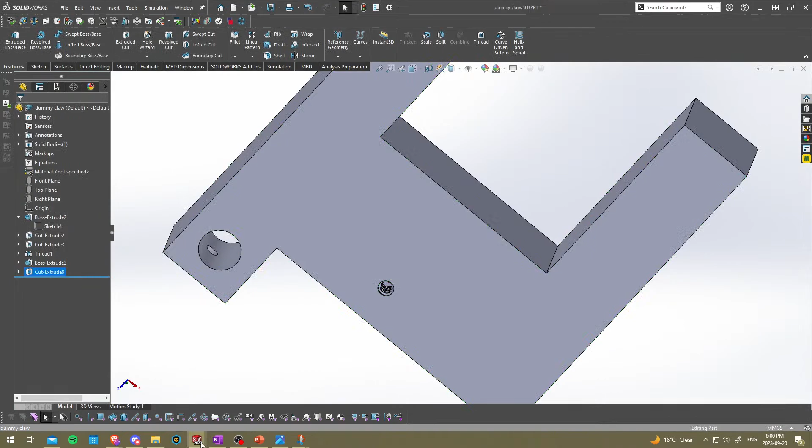So say you have this piece here. Let's do another set screw. I'm gonna do this quickly because I just want to show you the idea. So with this type of wrist, obviously you could make this centered. I didn't make it centered, but basically the claw would rotate. It wouldn't twist. I don't know what this would be called. I think this is like a tilt. So let's call this a tilt. So yeah, you'd make it tilt. Let's add this mate as well.

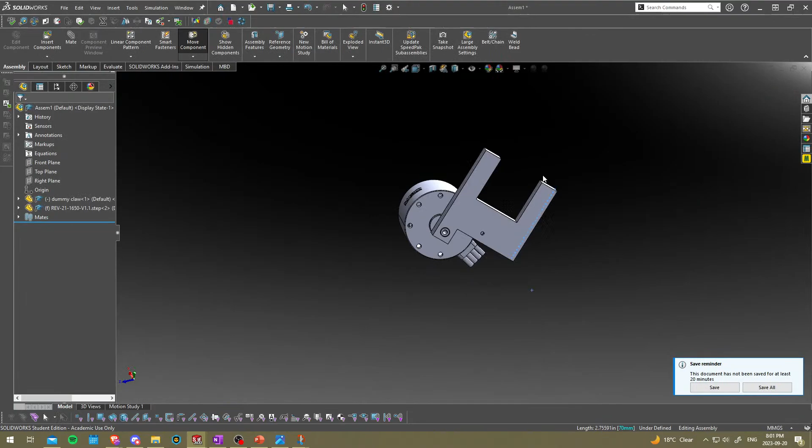So you have the choice of either mounting the wrist the twist way or the tilt way. And then from there, you'd make some type of limb that connects this. It'd be a structural piece that connects this motor to essentially a second motor, as seen in this drawing here, where this is the wrist motor and then this is the second elbow motor. So you'd have to make this gray piece here. So that would be your forearm.

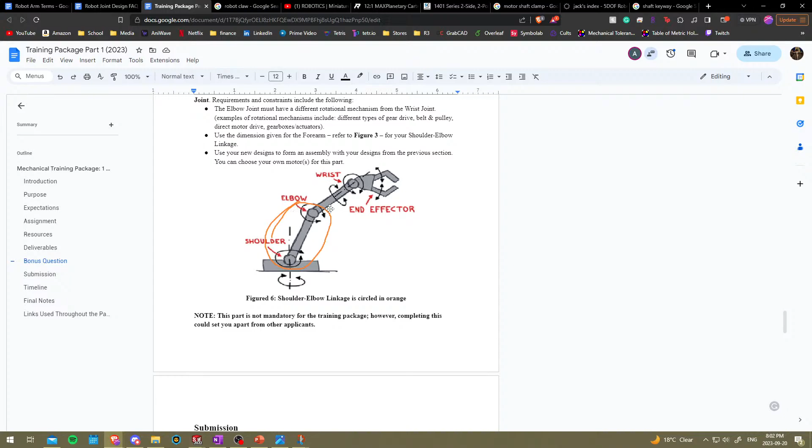And that's essentially what Huang wants you to do for your submission. It incorporates mechanical design in the claw, and then it incorporates structural design in the way you make your forearm. So when you're making something structural, let's search up structural support. There's different ways you can make it. You can make something that's just thick and strong, but that's very simple. You can make it light and sturdy.

So I-beams, for example, is something that was invented to reduce weight, but also make something sturdy. So it's very hard to flex an I-beam. You'd want the same with a robot arm. You don't want it to be able to bend. So the way that you make your forearm has to be structurally sound. You just gotta figure out how you would do that.

You could do a tube. Tubes are very good because they take loads very well, but they're bad, I think, torsionally. So there's different factors with every type of structural component. This here is pretty much just a plate. Plates work fine too. The only thing is they could bend in the opposite direction. You could do multiple plates. Let me find an idea.

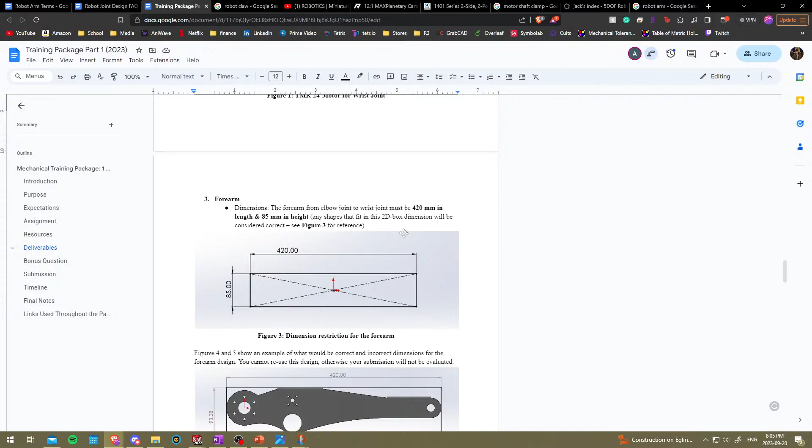It's the structural component of your design. Those are the two main things we're looking for. Last year we were looking for something different. This year Huang wants some mechanical and some structural, because the structural shows more of your creative design on making things look good but also strong, and then the mechanical design is how well you could integrate mechanisms together to make something that moves.

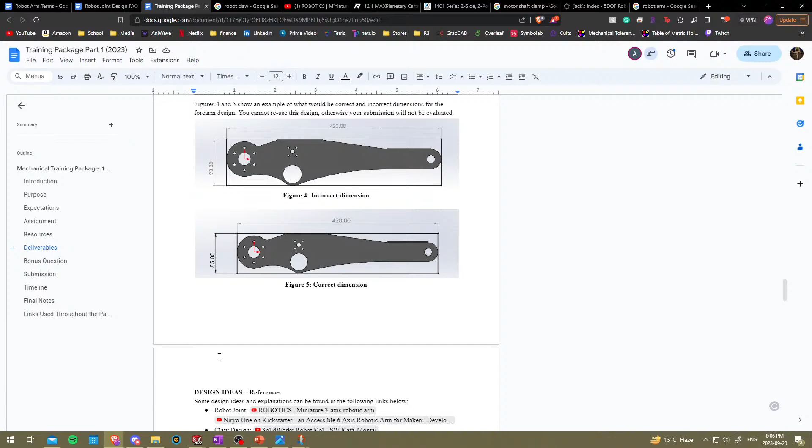So I will be accepting questions now. I finished what I'm going to be teaching today. On Sunday, I will be going over CAD, how to use Onshape, how to use SolidWorks, and answering more questions. But today was more so intro and brief on how to actually complete this module. So if you guys have questions, start asking. I will accept them.

Nah, this definitely has to be fucking Ryan from software. There's no Ryan Lee in mechanical. This guy's a capper.